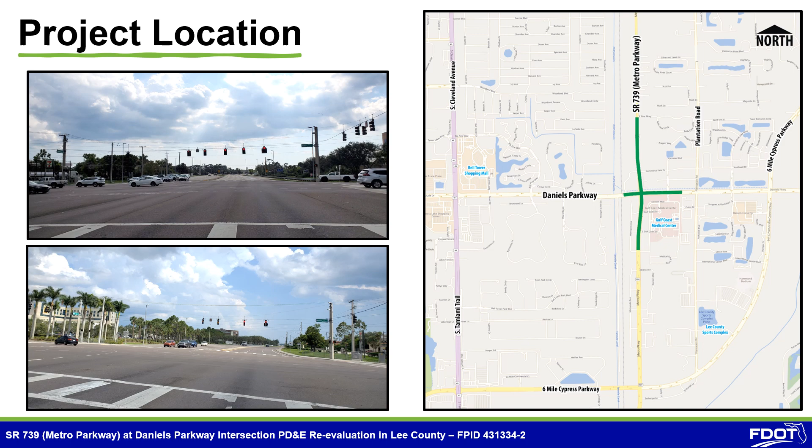FDOT District One previously conducted a PD&E study, FPID 195650-1, that was approved by the Office of Environmental Management as a Type 2 categorical exclusion, or CE, on February 11, 1999. Since then, the design has been optimized, resulting in changes to proposed right-of-way impacts.

The original design was proposed as part of the Lee County 2020 Financially Feasible Plan to provide improvements that would increase capacity at the intersection, as the projected increase in traffic resulted in an unacceptable level of service by design year 2020. The original PD&E improvements were not funded. A significant period then passed, which warranted a revised review of the traffic volumes in 2013. The analysis using the new traffic volumes included the evaluation of 5 intersection configuration concepts.

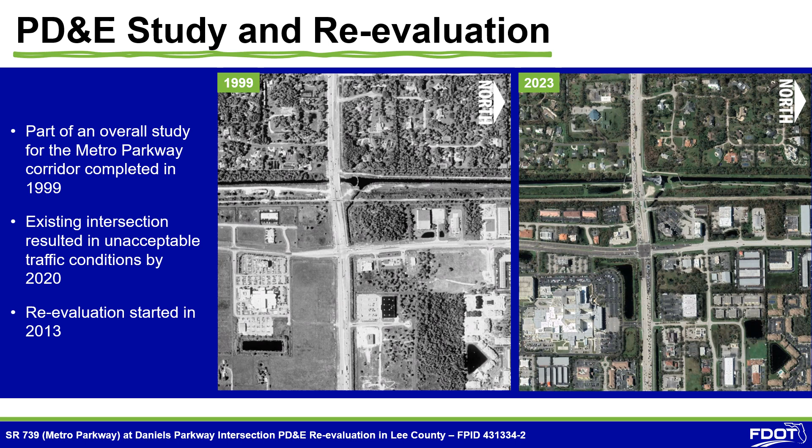The intersection of Metro Parkway and Daniels Parkway is currently an at-grade signalized intersection. Metro Parkway has 2 12-foot through lanes, 12-foot dual left turn lanes, and 12-foot right turn lanes northbound and southbound. Daniels Parkway has 3 12-foot through lanes, 12-foot dual left turn lanes, and a 12-foot right turn lane eastbound and westbound. There are pedestrian crosswalks on each leg of the intersection and a bicycle lane on northbound Metro Parkway adjacent to the curb. There are 8-foot sidewalks surrounding the intersection, and there is roadway lighting southbound, eastbound, and westbound approaching the intersection.

The right-of-way, or property FDOT already owns, at the intersection varies with a minimum of 125 feet to 192 feet on the south leg, and 147 feet on the north leg of Metro Parkway. Daniels Parkway has 250 feet of right-of-way.

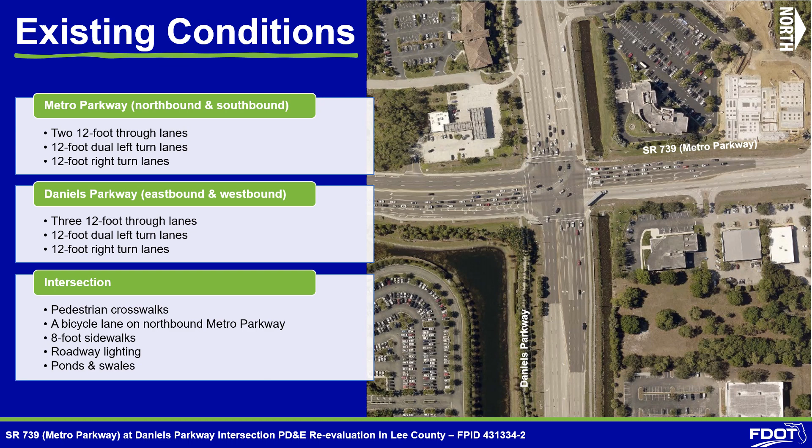An intersection analysis report was finalized in 2018 that evaluated projected traffic volumes and various alternative designs to accommodate growth. FDOT considered 5 different concepts to modify the Metro Parkway and Daniels Parkway intersection in consideration of 6-laning Metro Parkway to increase capacity and improve safety. All of the concepts considered 3 through lanes in each direction, but modified the left and right turn lane configurations.

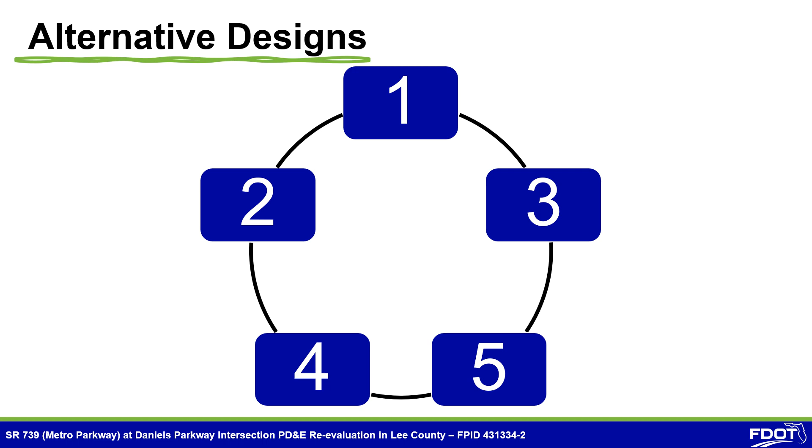Concept 1 was an at-grade intersection that included 3 southbound left turn lanes, 2 northbound, eastbound, and westbound left turn lanes, and 1 right turn lane on each approach. Concept 2 was also an at-grade intersection that included 3 northbound and southbound left turn lanes, 2 eastbound and westbound left turn lanes, and 1 right turn lane on each approach. Concepts 1 and 2 were eliminated from consideration due to their insufficient operational performance.

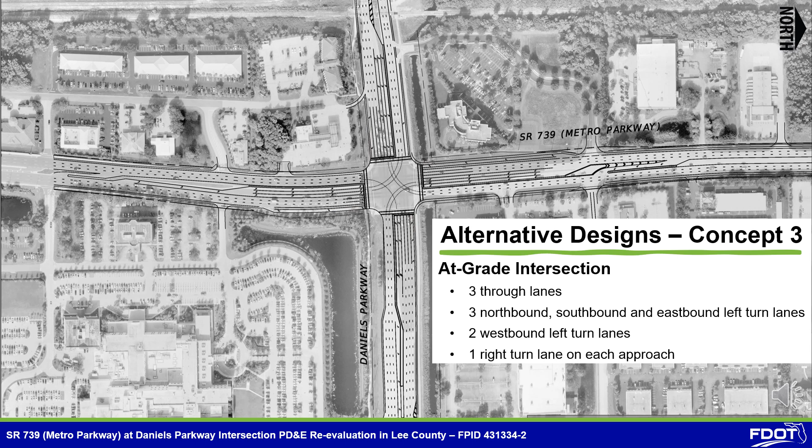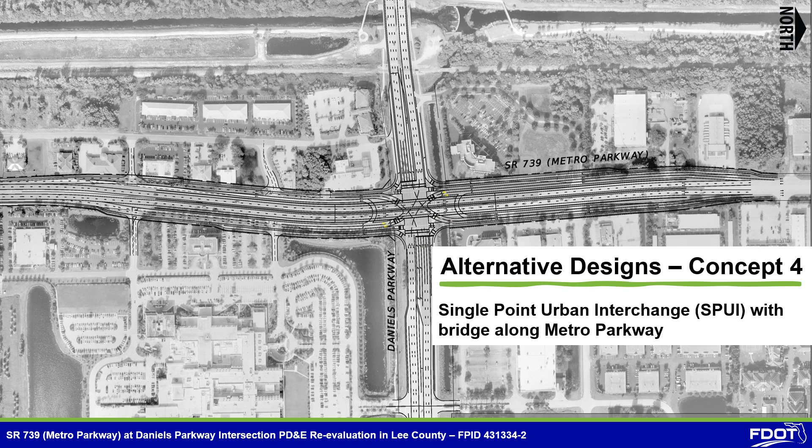Concept 3 was another at-grade intersection that included 3 northbound, southbound, and eastbound left turn lanes, 2 westbound left turn lanes, and 1 right turn lane on each approach. Concept 4 was a single-point urban interchange, or SPUI, with a bridge along Metro Parkway. The primary benefit of a SPUI is that it allows the turning movements from the ramps to turn at the same time. This concept was removed from consideration due to the high construction cost.

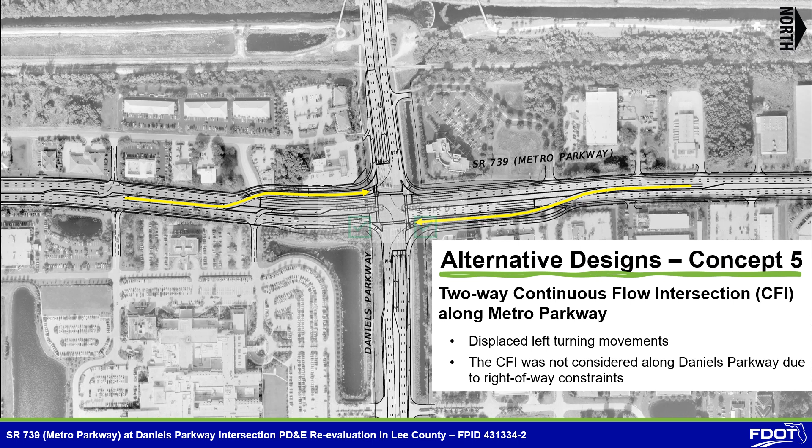Concept 5 was a 2-way continuous flow intersection, or CFI, along Metro Parkway. The CFI was not considered along Daniels Parkway due to right-of-way constraints. The primary function of a CFI is to place the left-turning movements in advance of the central signalized intersection. Concepts 3 and 5 were the only concepts that were further analyzed.

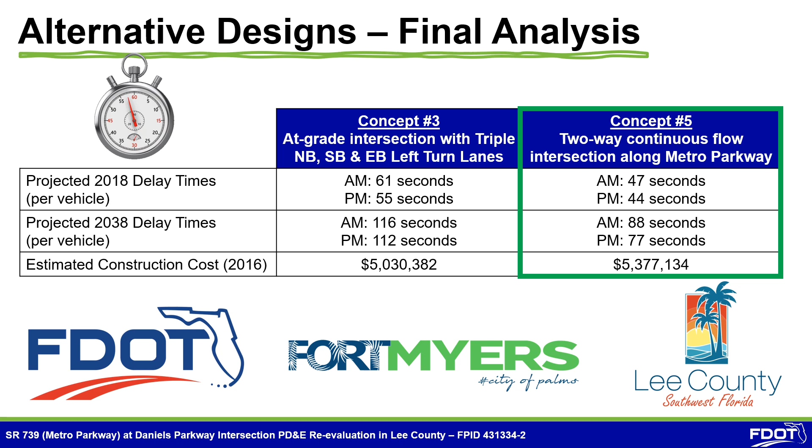While both concepts had similar construction costs, the 2-way continuous flow intersection provided significantly more capacity to meet future traffic demands. The final decision to utilize Concept 5 at the Metro Parkway and Daniels Parkway intersection was coordinated with FDOT, the City of Fort Myers, and Lee County.

The proposed CFI will replace the at-grade intersection that is currently in place at the intersection of Metro Parkway and Daniels Parkway to provide a 6-lane divided curb and gutter facility. North of Daniels Parkway, the proposed design will add one 11-foot through lane in each direction, and an 11-foot northbound through lane will be added south of Daniels Parkway. This will result in 6 lanes along Metro Parkway.

The project will also add an additional 11-foot northbound left turn lane onto Daniels Parkway for a total of 3 northbound turn lanes. The proposed CFI places the left turn lanes on Metro Parkway several hundred feet in advance of the Daniels Parkway intersection, which separates the conflicting through movements and left turning movements at the intersection.

A closed-circuit television system, or CCTV, will be installed at the Daniels Parkway approaches to provide traffic monitoring and incident management capabilities. Intersection and corridor lighting will be added along Metro Parkway. LED light fixtures will be used to increase nighttime safety for drivers, bicyclists, and pedestrians.

Pedestrian crossings will be modified to accommodate the new intersection configuration, and pedestrian signal displays, providing the countdown seconds, will be added to each pedestrian crossing showing the remaining crossing times. This will provide information to pedestrians about the time remaining to safely cross the street at the signalized intersection.

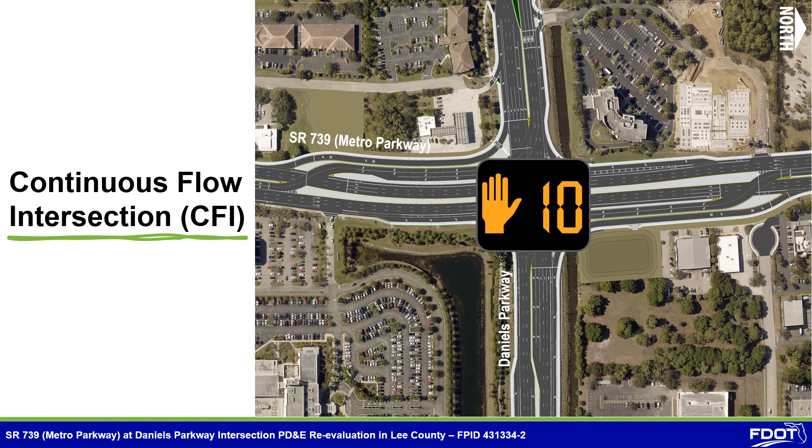The existing sidewalks within FDOT right-of-way will be replaced with new 8-foot concrete sidewalk, and we will also add a new 8-foot concrete sidewalk adjacent to the roadway in the southeast corner of Daniels Parkway in front of the Gulf Coast Medical Center. The Lee-Tran bus stop locations will remain the same.

7-foot buffered bicycle lanes will be provided adjacent to both the Metro Parkway and Daniels Parkway through lanes to allow for continuous flow for those riders wanting to use the roadway pavement. Bicyclists wishing to turn left onto Daniels Parkway will do so via the pedestrian crosswalks.

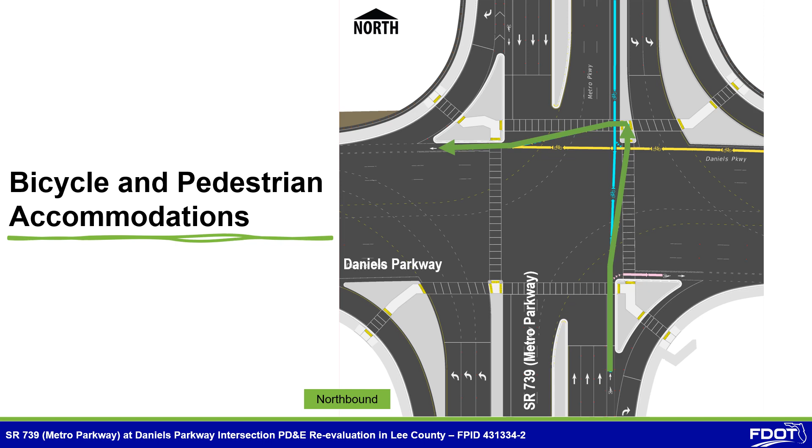Bicyclists wishing to make left turns at the intersection will need to utilize the crosswalks, not the vehicle left turn lanes. For example, if you are in the bicycle lane heading northbound, which is shown here in blue, and wish to turn westbound, which is in yellow, you will travel through the intersection to the curb ramp at the northeast corner. Once the walk phase is active, you will then proceed through the crosswalk until you can again get into the marked bicycle lane heading west.

Existing drainage patterns will be maintained. Care has been taken to ensure that the areas contributing stormwater runoff to the FDOT pond at Metropolis Avenue and the treatment swales adjacent to the John Yarborough Linear Park will not prohibit these locations from continuing to function as designed. A new pond will be constructed in the northeast corner of Metro Parkway and Daniels Parkway. This pond is designed to accommodate additional stormwater runoff due to the increase in pavement area associated with the CFI.

The existing span wire signal at the intersection will be replaced with mast arm signals. This includes 2 mast arm signals at the Metro Parkway left turn crossover location so that northbound and southbound left turning movements onto Daniels Parkway will have their own signal phasing. This provides more green time for the through travel lanes, which improves intersection capacity and reduces delay times. It also increases safety by eliminating the left turning conflicts for Metro Parkway.

On Metro Parkway, the vehicle movements for the through and right turns will remain the same as a conventional signalized intersection. On Daniels Parkway, the left turns and through movements will occur at the intersection with Metro Parkway. The right turns from Daniels Parkway will be accommodated by channelized right turn lanes that will connect to Metro Parkway. Pedestrians at the channelized right turn lanes will be accommodated by crosswalks.

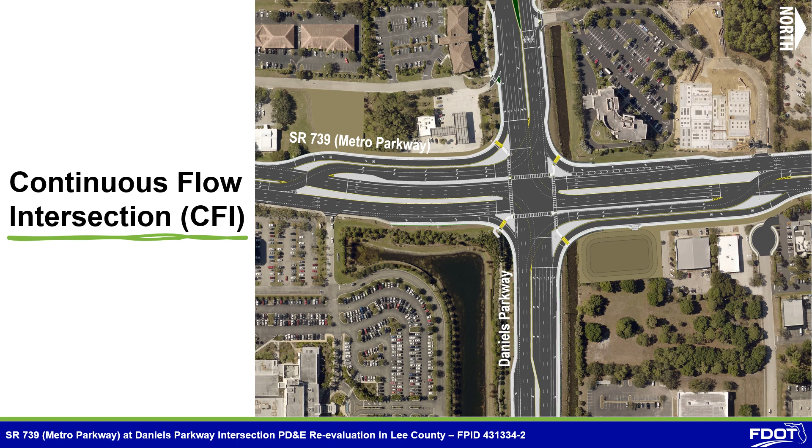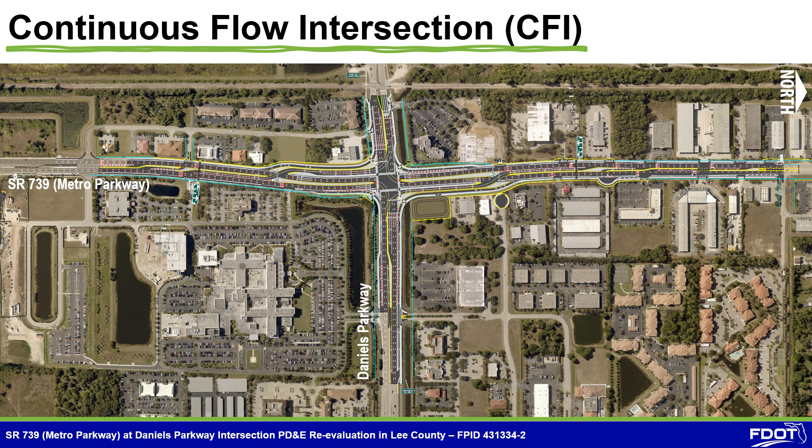Additional improvements will be required within the project limits. These improvements will include pavement widening, drainage modifications, installation of light poles, side street and driveway closures, median modifications, additional guide signs, and new pavement markings. Right-of-way varying in total width from 125 to 230 feet is needed to accommodate the CFI.

In accordance with Rule 14-97 of the Florida Administrative Code, the proposed improvements will include driveway and side street closures to control the movements or access of turning traffic. These changes are presented in compliance with Section 335.199 of the Florida Statutes, Transportation Projects Modifying Access to Adjacent Property.

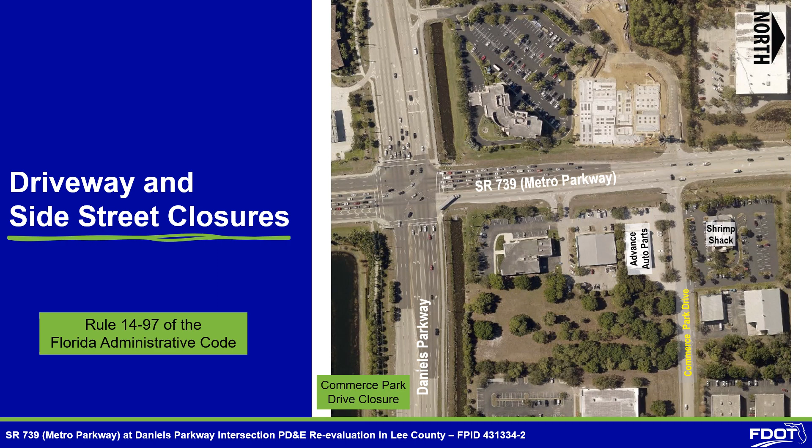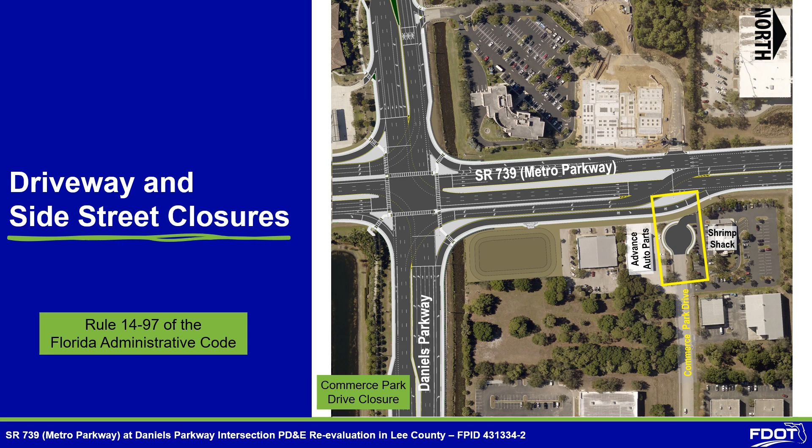Access to and from Metro Parkway at the west leg of North Gulf Coast Lane will be eliminated due to the intersection widening. In addition, the Commerce Park Drive side street access from Metro Parkway at Shrimp Shack and Advance Auto Parts will be eliminated and converted into a cul-de-sac. Access for these businesses to and from Metro Parkway will no longer be allowed. These businesses will now be accessed via multiple side street options off Daniels Parkway.

As a result of the new intersection configuration, there will also be 4 driveway closures within the project limits to eliminate conflict points and increase safety. The 7-Eleven driveway connection to Metro Parkway will be removed.

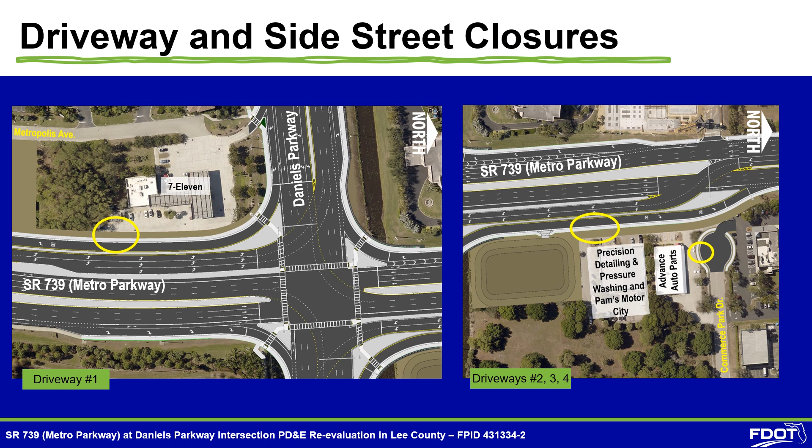The right-in connection from Daniels Parkway that also connects to Metropolis Avenue will remain. Joint-use driveway connections to Scan Design, Precision Detailing and Pressure Washing, Pam's Motor City, and Advance Auto Parts will be removed. The Commerce Park Drive access will remain for these businesses.

FDOT evaluated environmental and socioeconomic factors relating to the proposed intersection improvements in accordance with the National Environmental Policy Act of 1969 as amended and other federal requirements. The evaluation considered the effects of the continuous flow intersection at Metro Parkway and Daniels Parkway on threatened and endangered species, wetlands and floodplains, water quality, stormwater management and permitting, noise, contamination, cultural and historic resources, land use, construction effects, and right-of-way requirements and relocations.

Threatened and endangered species are allowed special protection under the Endangered Species Act of 1973 as amended and Florida statutes. FDOT assessed species within the project limits and through ongoing coordination with U.S. Fish and Wildlife Service has determined that the proposed project may affect, but it is not likely to adversely affect, the existence of certain federally listed threatened or endangered species. These animal species include the eastern black rail, the wood stork, the eastern indigo snake, and the Florida bonneted bat.

Coordination with U.S. Fish and Wildlife Service regarding the final status of these species is ongoing. FDOT District One will continue to work closely with environmental agencies in future phases to meet all environmental permitting requirements.

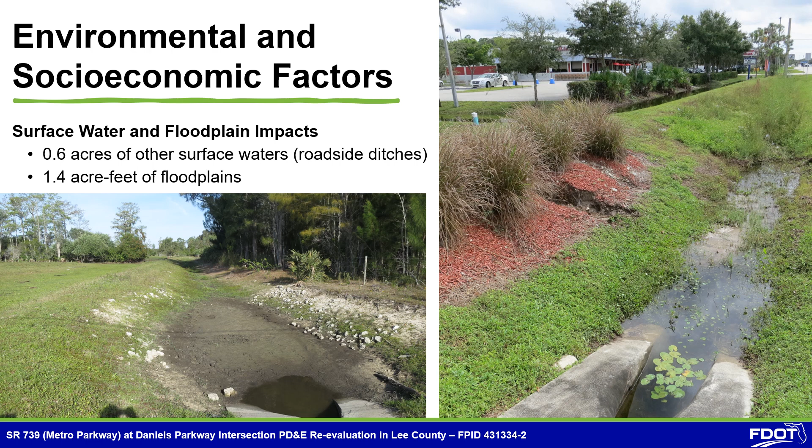The project has also been evaluated for potential floodplain involvement in accordance with Executive Order 11988, Floodplain Management. While there will be minor impacts to 1.4 acre-feet of floodplains, there is no significant change in flood risk as a result of the proposed intersection modification, nor is there significant change in the potential for interruption or termination of emergency services or emergency evacuation routes due to flooding. Minimal impacts are expected to the 100-year floodplain.

While traffic noise abatement was considered as part of the project, no feasible and reasonable measures were identified that can be implemented to abate traffic noise due to the intersection reconstruction.

Results of the environmental contamination screening showed that there were 2 sites marked medium for potential contamination. For these sites, the FDOT project manager and the district contamination impact coordinator will coordinate on further actions during the design phase that must be taken to address contamination issues. Before construction, specially trained crews will address contamination in these areas as required. Locations of these sites are shown in the concept plans on display tonight.

A cultural resource assessment survey was conducted in accordance with the National Historic Preservation Act of 1966 and Florida statutes. Archaeologists and historians identified no archaeological sites and 1 historic resource in the project area. 1 resource is individually eligible for listing in the National Register of Historic Places, the CSX Railroad/Seminole Gulf Railway. The archaeological consultant determined that there would be no adverse effect to the CSX Railroad/Seminole Gulf Railway, and no significant historic properties identified would be adversely affected by the proposed improvements.

This project is not expected to change future land use patterns on Metro Parkway or Daniels Parkway, nor result in adverse impacts to water quality and air quality.

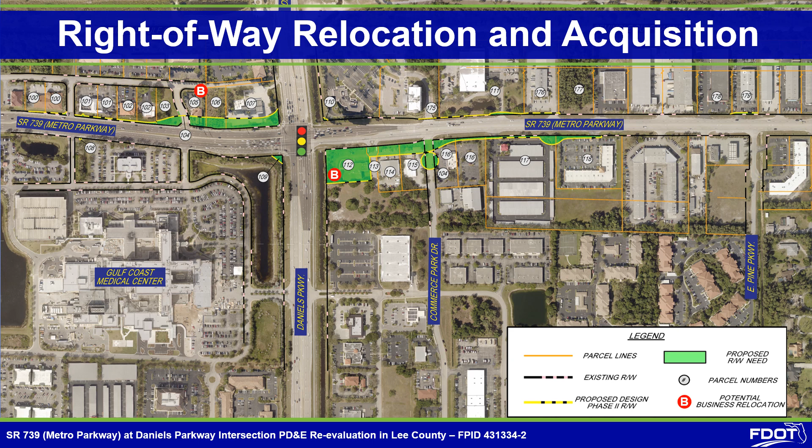An evaluation matrix showing a detailed comparison of the 1999 PD&E recommended concept and the currently proposed design is in the project handout and is also on display here this evening. The matrix shows potential effects to the social, cultural, natural, and physical environments and identifies preliminary costs. The costs from the original PD&E estimate have been escalated to present-day value for comparison purposes.

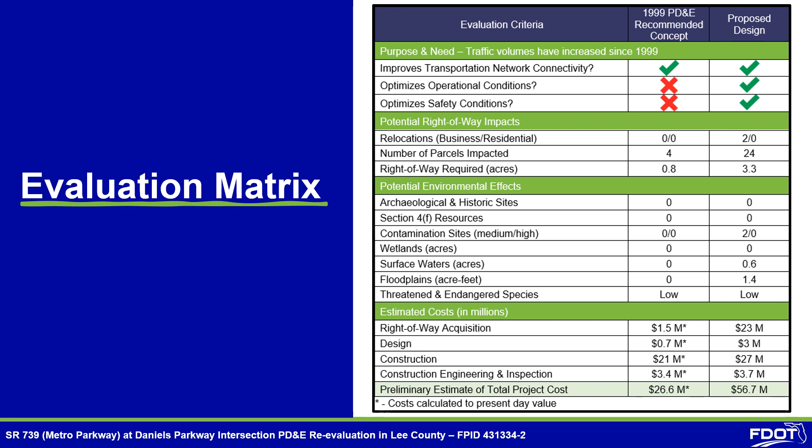The estimated cost for the continuous flow intersection at Metro Parkway and Daniels Parkway includes $3 million for final design and $23 million for right-of-way acquisition for roadway and stormwater management areas. The estimated construction cost for the project is $27 million. The cost for construction, engineering, and inspection is estimated at $3.7 million. The department's preliminary estimate of the total project cost is $56.7 million. At this time, the FDOT's adopted 5-year work program includes funding for right-of-way acquisition for roadway and stormwater management areas in fiscal year 2025 and construction in fiscal year 2026.

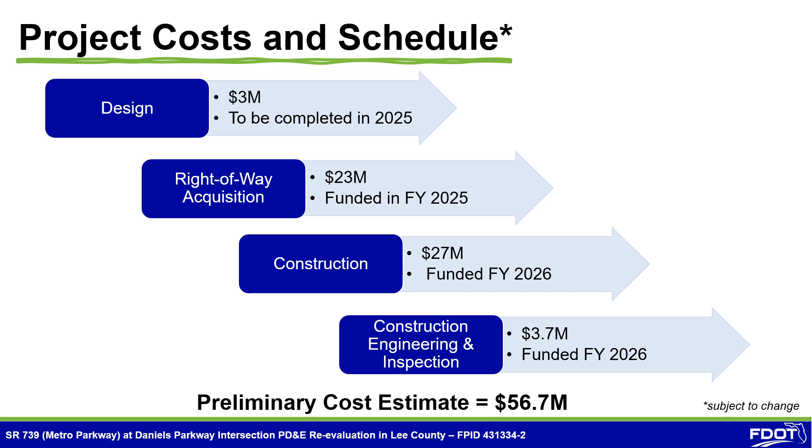We encourage you to review the project information tonight, complete the comment form and drop it in one of the boxes provided, or you can fill out a speaker request card to participate in the public testimony. Online, you can submit comments via the GoToWebinar question box or submit comments through the project website. You may also mail or email your comments to the FDOT Project Manager, Christopher Spees. Comments must be submitted by August 10 of 2023 to be included as part of the public record.

If you would like to review these materials at the District 1 Southwest Area Office, please make an appointment by contacting FDOT's Project Manager, Christopher Spees, using the contact information included in your handout. You may also visit the project webpage at www.swflroads.com/project/431-334-2 for the latest project information, schedule, and upcoming events.

This PD&E study has been conducted and completed according to the requirements of the National Environmental Policy Act and other related federal and state laws, rules, and regulations, which will qualify future phases of this project for federal funding, and this hearing was advertised consistent with those requirements. Please see the statute display board for all other applicable requirements.

This hearing is also conducted in accordance with the Americans with Disabilities Act of 1990 and with Title VI of the Civil Rights Act of 1964 and related statutes. Anyone who feels he or she has been discriminated against with regard to race, color, national origin, age, sex, religion, disability, or family status may complete one of the forms located at the sign-in table and mail the completed form to the address listed on the display board.